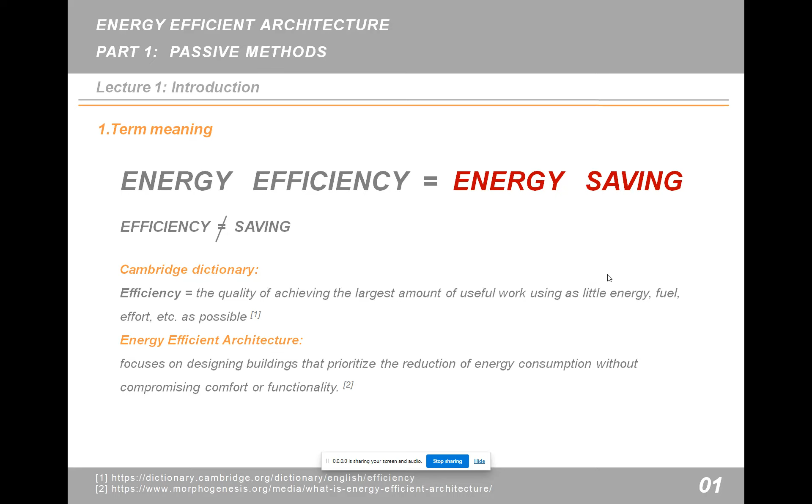More specifically, in architecture, energy efficiency focuses on designing built environment that prioritizes the reduction of energy consumption without compromising any comfort or functionality.

The history of energy efficiency began in the mid 19th century as an academic and policy concern in highly industrialized Great Britain. A pivotal moment was the release of the book The Coal Question by Stanley Jevons in 1866, in which the industrial revolution's high dependence on fossil fuels was noted as they were becoming increasingly scarce.

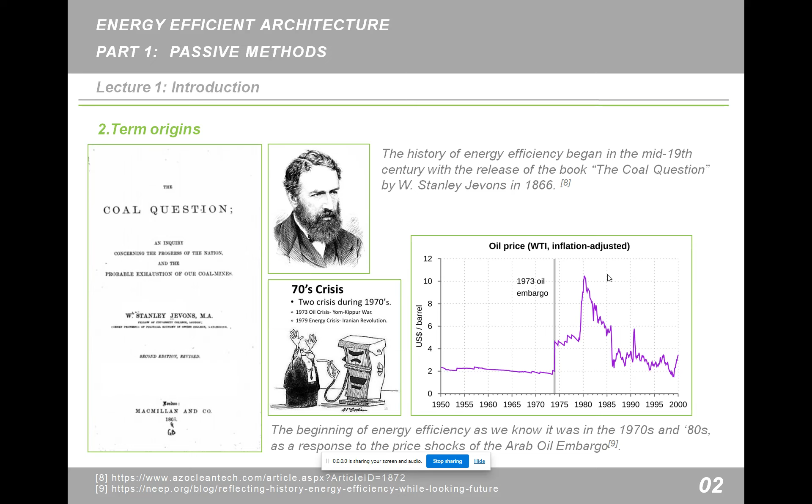Energy efficiency, as we know it, as a systematic, science based approach, was set in the 70s of the 20th century, and it was a response to the price shocks following the Arab oil embargo. First, all the measures were focused upon transport as the biggest fuel consuming sector, but very soon after that, the building sector became the largest priority of energy efficiency.

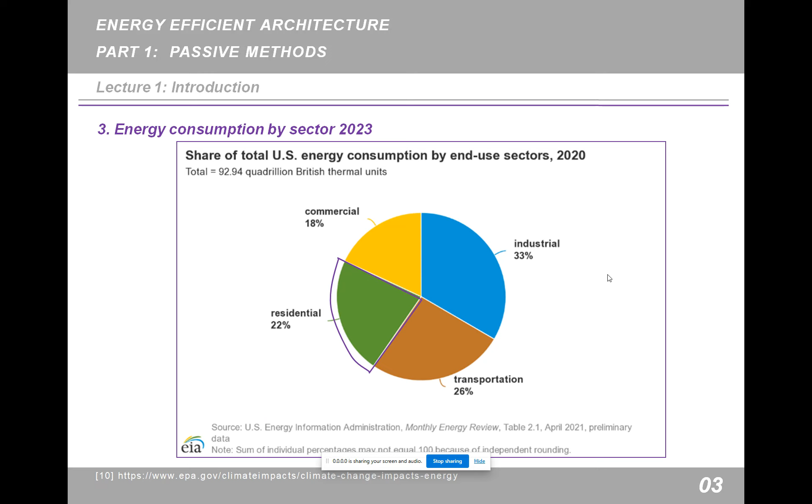One of the most recent studies upon energy consumption by sectors showed that buildings are still the largest energy consumer. Special attention is paid to the residential building sector and to reducing energy consumption for space heating, space cooling, water heating, and lighting in residential buildings for one single reason.

Unlike public buildings and industrial buildings, residential buildings are considered economically non sustainable since they only consume and they do not produce any economical profits to pay for the energy they use.

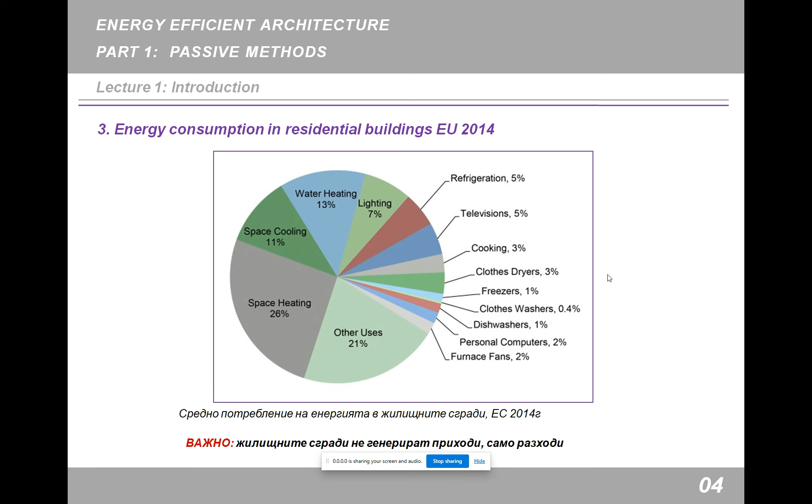Energy efficiency in architecture includes integrated processes covering two method groups: passive means and active systems. Passive means group concerns built environment organization and includes using nature elements, space organization, silhouette design, form factor, used construction materials, direct and indirect passive systems.

And all these methods, these measures, have to be considered during the design stage. In this group is also included effective insulation, although it can be applied later after the building is finished.

Active systems are added afterwards and just need adaptation to existing elements and space organization. Their purpose is to replace conventional systems with ones that consume less energy or use alternative energy sources. Such systems are solar panels, photovoltaics, thermopumps, wind turbines, biofuel generators, and others.

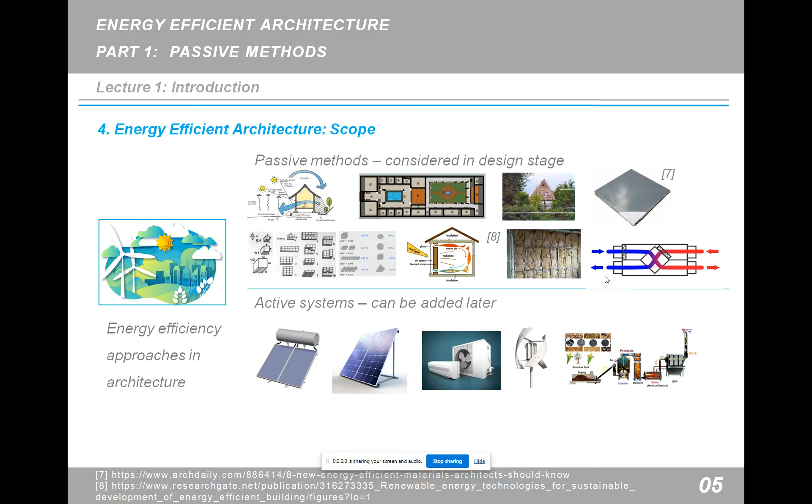The areas of application of energy efficiency in architecture can be at the stage of urban planning, at the stage of site organization, building organization, interior design of a single room, and of course the materials of the construction elements.

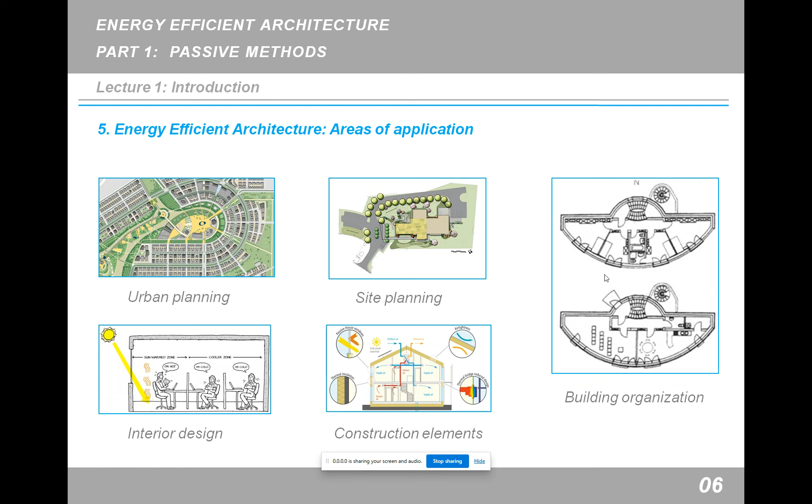The living comfort aspects energy efficiency in architecture deals with are the thermal comfort, which includes warming and cooling, lighting comfort, that includes natural lighting, its distribution, and shading if needed, artificial lighting, and visual comfort. So the lighting should be not too much to tire the eyes or too small a quantity so the eyes get too frustrated to see.

Air quality, which includes natural ventilation, both casual and controlled, forced ventilation using different systems, and air humidity and composition.

And the last group of aspects is the acoustic comfort, and it's the newest trend in energy efficiency, and it includes controlling airborne sounds, controlling structural noises, and providing the best acoustic for the room and the functions that happen in it.

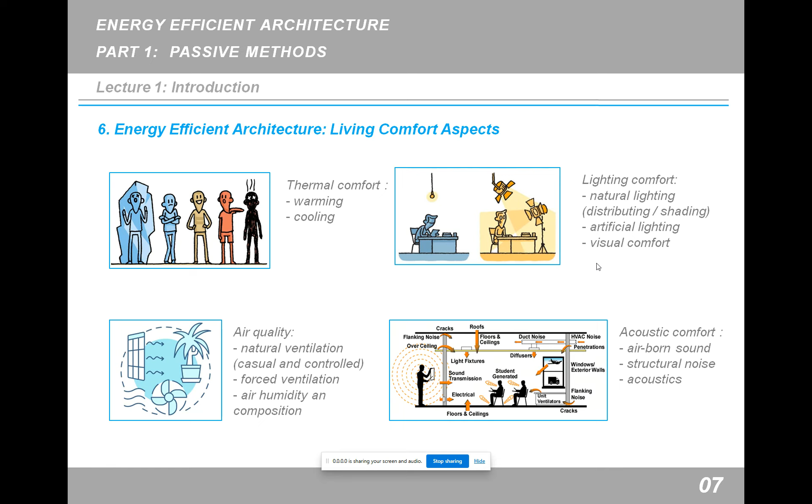Some basic processes and terms: energy efficiency works with three kinds of energies, usually transforming between themselves, which are the heating energy, electricity, and electromagnetic solar radiation, and the ways to transform one of these energies into another.

As an example, when we plug the radiator into the electricity grid, the electricity warms the radiator and it starts to produce warm energy.

The other process energy efficiency works much with is the exchange of warmth. It happens between objects with different temperatures. The larger the difference is, the faster the process of the exchange goes between the two objects. As the temperature of the two objects become closer and the difference becomes smaller, the speed of the process lessens and the exchange of the warmth becomes slower until theoretically both objects become equal in temperature.

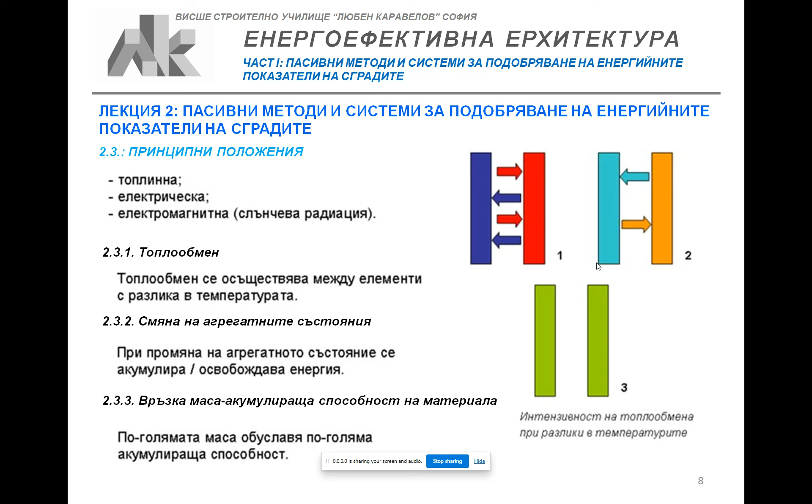The next moment in energy efficiency is the connection between the mass and the accumulating possibilities of the materials. The heavier, the denser the material is, and the thicker the element is, the more mass it possesses, the more warmth energy it can consume and keep within itself, and after that, release it to the surrounding air. And the opposite, the thinner the element is and the lighter the material is, the less warmth it can keep for a long period of time within itself.

And the last important moment is that thermal insulation usually is placed only around rooms in which there is an active heating or cooling system. It's not wrong to cover the whole building with thermal insulation, but an additional factor here is so-called economical efficiency,

because what is sought as the end result is that the sum of money given for the quantity of insulation put on the building is supposed to pay back and even to produce some profits in the period in which the insulation is working properly. Because each kind of insulation has its life period, after which its efficiency falls significantly, and it's not that efficient anymore.

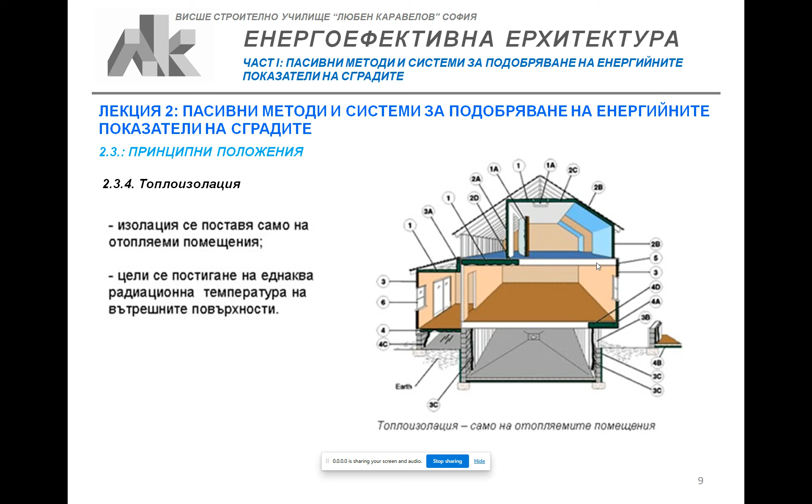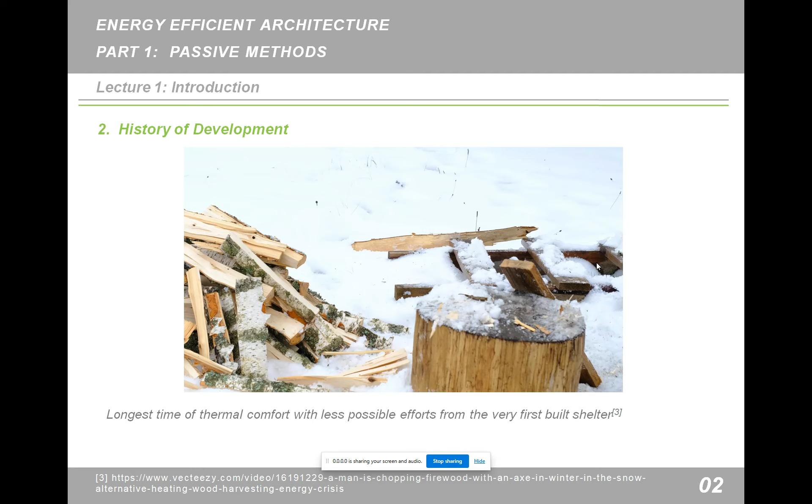Actually, the need of energy efficiency occurred with the very first human-built shelter, and up to a very recent period historically, if one needs to chop the wood for the winter to keep the house warm, the need of a house that will get warm as soon as possible with the least possible timber and keep that warmth as long as possible definitely was required.